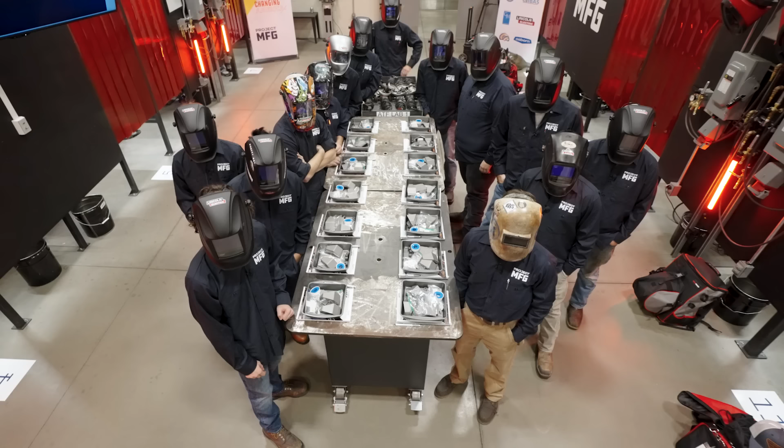14 of the most skilled student welders from across the country come together in one national welding challenge. Find out who welds their way to the title of Project MFG National Welding Champion.

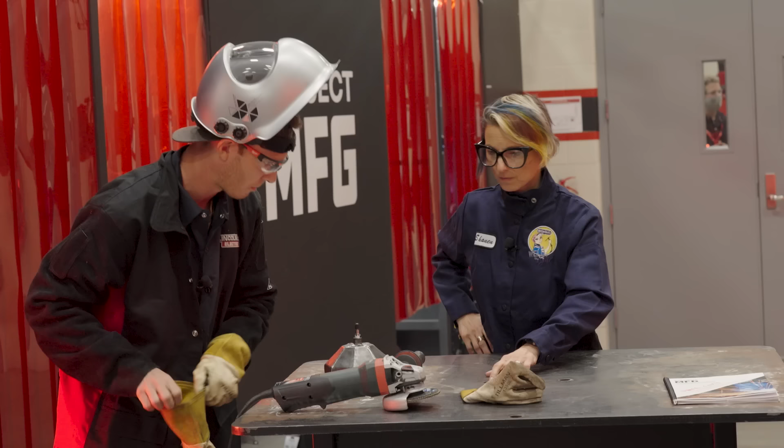Let's meet our panel of expert judges for the competition. Lead judge Shannon Aaronmore is the owner of Weld Like a Girl in Yuma, Arizona. Shannon is a certified welding inspector and educator who serves on 2 committees with the American Welding Society. A former college professor of wellness and psychology, she's known as the Wellness Welder and is passionate about empowering girls and women through welding. I want to have women and non-traditional folks represented in welding. It's exciting and it's fun, and I want to raise the bar.

Frank Dragolich has 32 years of experience in the welding industry, currently serving as the Lincoln Electric ATF testing supervisor and quality manager. Frank is an AWS certified welding inspector and educator who holds a patent for a welding process and has authored welding guides. He volunteers his time at the AWS, serving on the main Q&C committee as well as multiple subcommittees. I've performed over 700 welder qualification tests in the last 3 years. I see people have nerve issues every day. I think the nerves is what they're going to struggle with, especially with all these eyes on them.

William Anthony Kennedy is the Director of Sales for Osborn's Roller Technologies and Specialty Pipeline Division, with a background in both product engineering and creative design. He brings a costing engineer's perspective to the competition, as well as an eye for quality finishing and artistic expression. I think that it's challenging for the competitors going to be walking in blind, not knowing what they're up against, and then having to figure that out right there on the spot under a time crunch.

This competition is hosted at Lincoln Electric's world headquarters in Cleveland, Ohio. For over 125 years, Lincoln Electric has been the world leader in the design, development, and manufacture of welding products. Their weld school is the longest operating and most comprehensive welding training facility in the world. It's definitely way larger than any facility that any of the students that are competing were trained at. So just being on that kind of playing field, I know it's nerve-wracking. Being put to the test is definitely going to be challenging for each one of the competitors for sure.

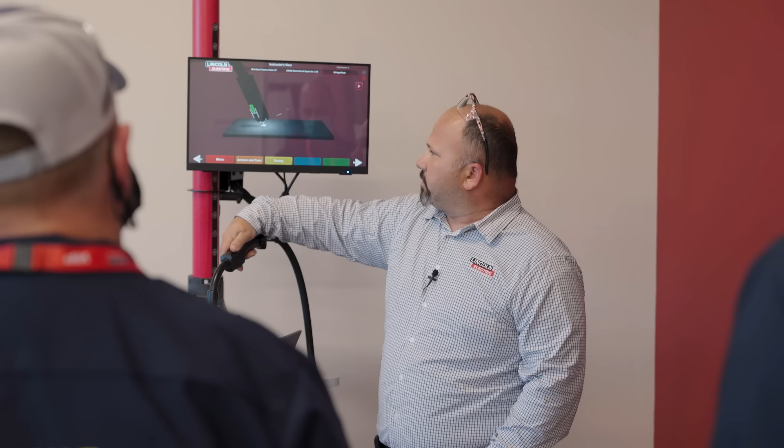We're trying to put students in a position where they don't feel 100% comfortable, because when they do hit the actual work field, they're going to be given challenges that maybe they're not anticipating. That's why we're doing what we're doing, to make sure that they're critically thinking when they're putting these parts together.

You guys know what a WPS is? It's not a work procedure sheet, it's a welding procedure specification, right? Pay attention. You guys get one shot at this, okay?

You guys liking this idea? Not so much. I like it better than the test. You like it better than the test? That's fair, I get it. Has any of you guys ever used one of these? No. It kind of gives an experience between the competitive level of everything to the stress level. It makes you question things, kind of forces us to stay on our toes, to be prepared for what may come along.

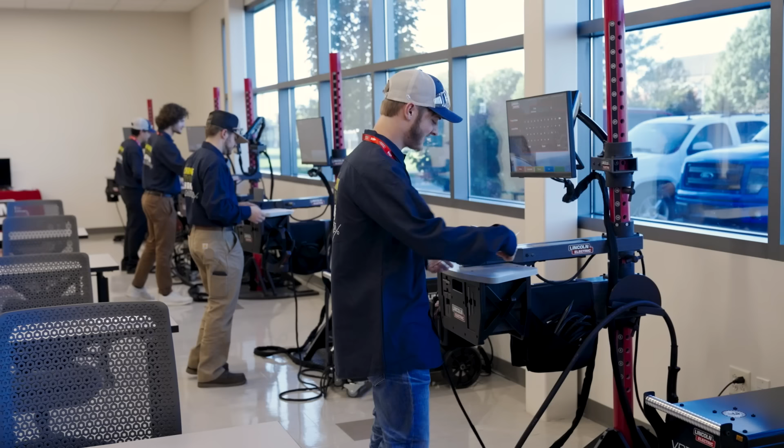Go. The welders start their virtual welding challenge. The task involves a simulation of shielded metal arc welding, or stick welding. The competitors make practice runs using the machine's advanced technology to alert them of adjustments they can make for a higher quality weld. Before time is up, they must complete one final weld without guidance.

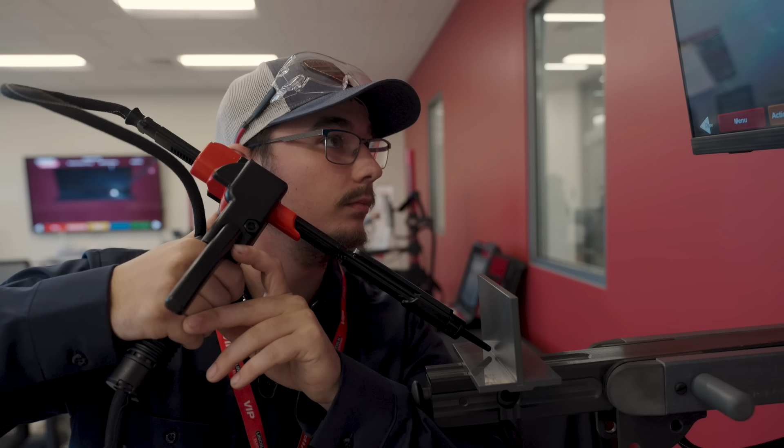Whatever score they finish with determines their placement for this event. It is similar to actual welding—it is not the same thing, but it does give you the muscle memory that will translate from the virtual world into the real world. It does pick up all the little flaws that maybe you'd be able to hide as an actual welder, but it's going to eliminate a lot of those flaws before you get into the welding booth.

It's definitely different. I can tell you that.

You guys have 2 minutes remaining. Please turn off your cues or else your score will not count.

My weaknesses are anything stick welding. It gets me out of my element, participating in competitions, and makes me nervous.

What'd you guys think? Was that fun? It's fun, it's different. Like it? It's weird. That's cool. Weird, cool, real weird. All in all, guys, excellent. If you have not used these before, you guys did a really good job.

Who rose to the challenge of virtual reality stick welding? With 10 points available, Wyatt Gwynn comes out on top with 9.6 points, followed by Peyton Schmidt with 9.3 and Nick Leone with 9.2. The written test results are still kept under wraps.

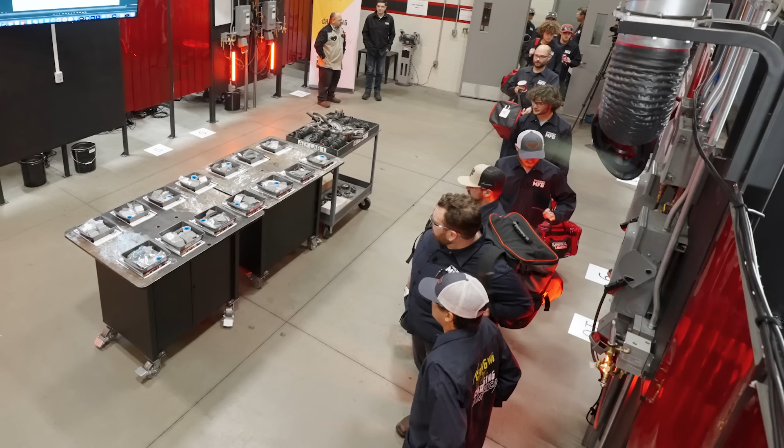Now it's time to see what these welders can do as the competition begins to heat up. The project specifications, equipment, materials, and time limit are all identical. What differs is each welder's plan of attack.

Going to a competition and not knowing what you're going to be welding on is like taking a trip across the country and picking a road you don't know where it's going to. You have no idea what the outcome's going to be. I'm going into this competition and I don't know really what to expect at all, so that's a little bit nerve-wracking because it could be almost anything. I think it's honestly very exciting not knowing what it is because everyone's entering on the same playing field.

Okay, here we go. 3, 2, 1, start. I want to challenge myself, so I want to see something I've never done before. When I open the playbook, I hope to see maybe a blueprint that's harder to read, that maybe I'm better at reading than everybody else.

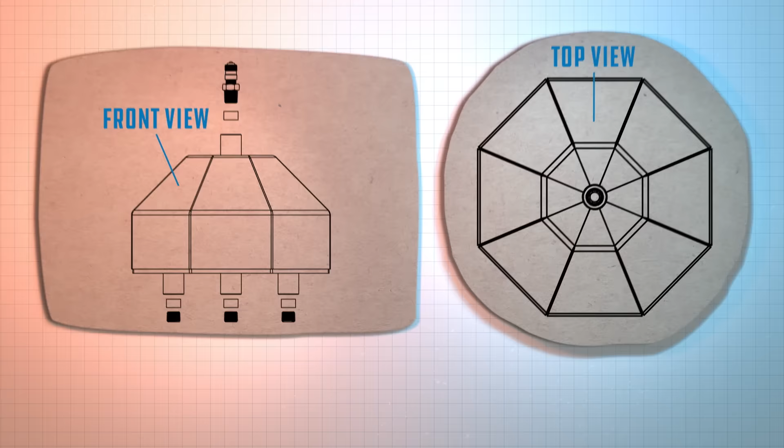Each welder receives a WPS, a welding procedure specification, that serves as a playbook for creating the product that meets production standards. In this challenge, they're making an octagon-shaped trophy with 8 individual parts welded together on a flat base using two common welding processes, MIG and TIG. The trophy is a pressure vessel, meaning it must be able to hold air without any leaks. No small task for a student welder.

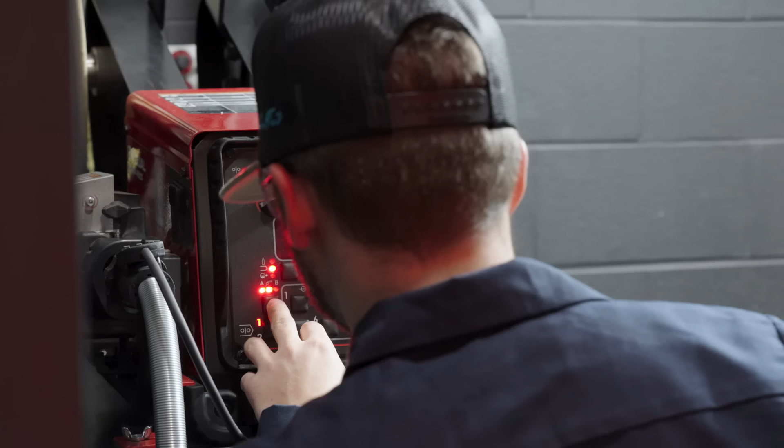How do you actually go construct something that doesn't exist? There's this problem, and this problem, and here are the criteria. And so now you're like, okay, I'm running out of fingers. And so critical thinking is essential for a welder.

Anyone who says, oh, they're just a dumb welder, I think you've got that completely wrong. I've met a lot of welders that were afraid of school because they thought they weren't very smart, but it turns out they're some of the smartest people I know because of what they can make.

Not everyone's good with their hands. Not everyone's made for the trades, but it's okay because college could be your backup.

Let's see what we got here.

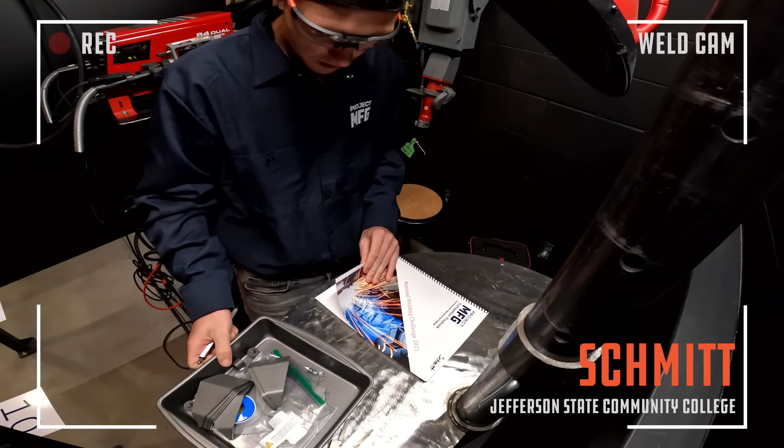What do we got? I graduated from the University of Alabama with a business degree and didn't find any jobs that I wanted. College is saturated right now, and you don't know what jobs are going to be available in the future, but we all know that the trades are going strong.

My dad's been super supportive of this path. He's the one who bought me my first welder, so that was pretty much what got me into it. It was a cheap 90 amp flux core welder, and I fixed his exhaust pipe on his truck, and it felt so good to be able to do something where he would have had to take his truck to the shop. I went and got underneath it and just patched it up, so that was really probably what got me - him getting me a welder and just supporting it and saying, yeah, go for it.

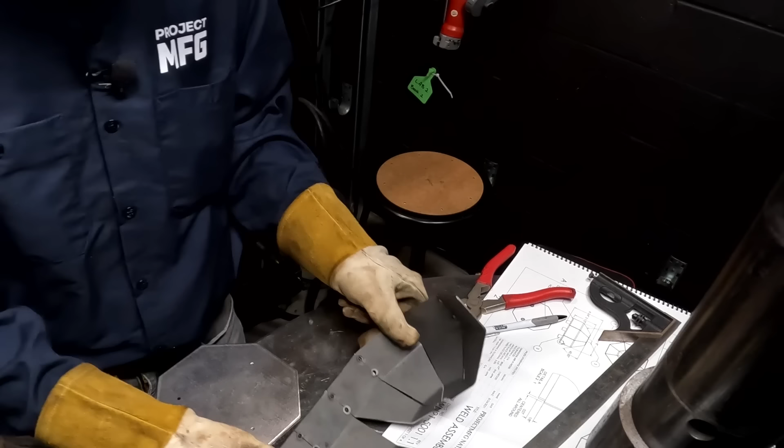I lost a competition when I was 17, and then after that, I just drove forward and I said, I'm not gonna let that happen again. It's pretty amazing that I have the opportunity to be here.

I had a fascination with metal, how you could take something so solid and turn it into whatever you wanted. I've always been fascinated with fire as well, so just metal, fire, and creativity all in one.

It's time for a little Welding 101. Welding is a fabrication process that uses intense heat and pressure to melt and fuse metals together.

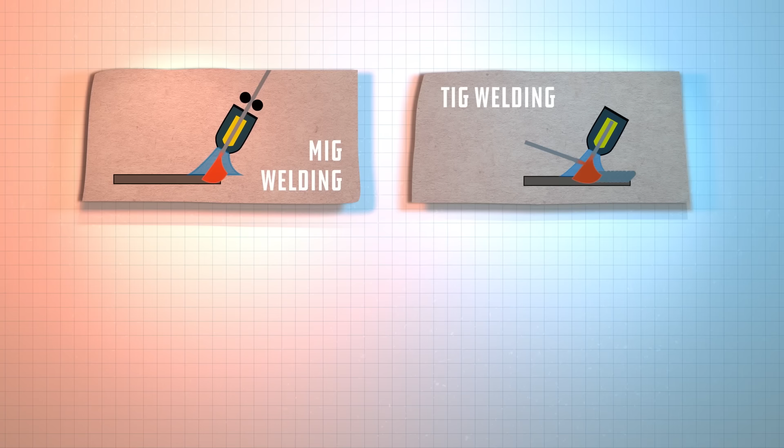While it may sound simple, there are several complex types of welding, the four most common being MIG, TIG, stick, and flux core. MIG welding uses a wire fed through the weld gun that acts both as an electrode conductor and filler metal, first creating the spark, then melting to form the weld. One of the easier processes to learn, MIG is popular with beginner welders. An efficient way to weld metals of varying thicknesses, MIG is widely used in the manufacturing and construction industries.

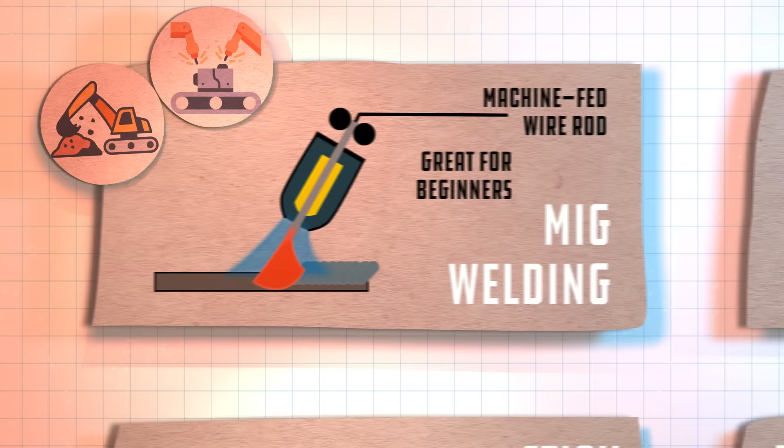While MIG relies on an ongoing wire feed, TIG welding uses a non-consumable tungsten electrode to heat welding rods that are placed by hand in a pool of molten metal to fuse two metals together. Often considered one of the most challenging methods to master, TIG welding requires a great deal of skill and finesse to produce the precise and detailed work often found in aerospace, automotive, and construction industries. Now that we've sparked your interest, let's get back to the competition.

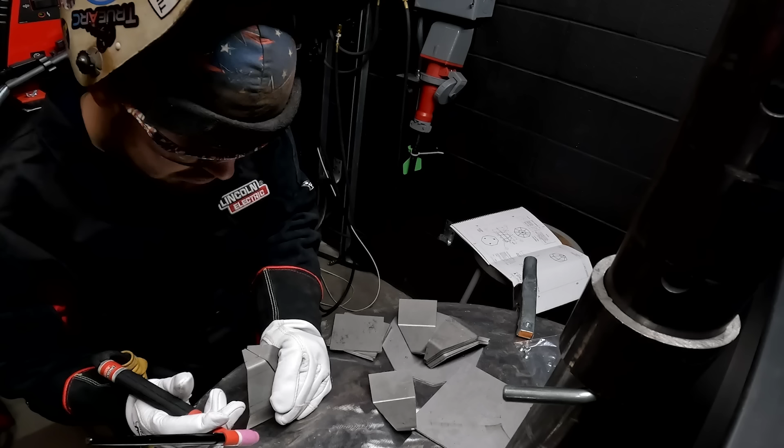Well, this is gonna be interesting. I'm smooth sailing right now. I'm a great TIG welder in my opinion, but that's a welder saying it, so every welder is gonna say that. Blueprints can get me sometimes, but I'm not saying I'm terrible. It's just they throw in a few tricks there, they might get me.

Everybody out? Come on out. Guys, I just got a phone call from the engineers. We got some change orders. Uh-oh. Okay? We're gonna go ahead and go to the mild steel trophy base.

You guys see that? Right there it says process GMAW spray transfer. We're gonna change that to short circuit transfer. Wait, can you repeat that? The change order details from the engineer include technical changes to the process, wire speed, and voltage settings. It's up to the competitors to take accurate notes and implement the changes. The welders get back to work with the adjusted plans in hand.

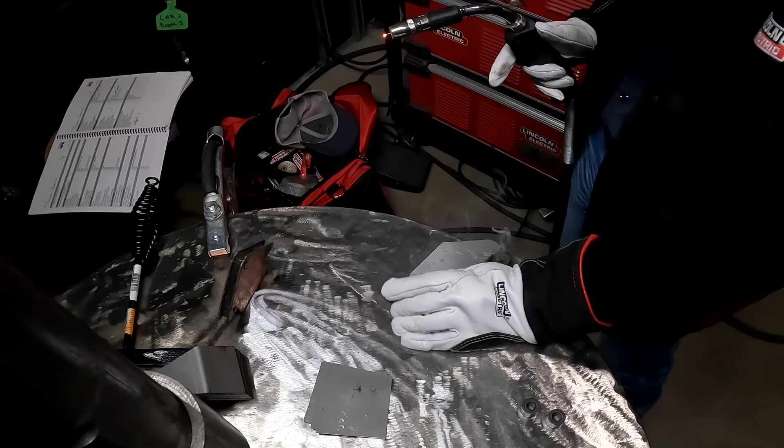Pretty confident. I'm a little maybe overconfident, but I was glad to make it into the competition, come up here and show what I can do.

Okay, so how are you feeling? Pretty good, it seems to be going pretty good, it ain't too bad. Okay, you're not feeling overly nervous or anything? Nah. What about that field change, did that throw you for a loop? It was unexpected, I didn't expect that. It was a little different, but I hadn't started yet, so it's still going all right.

I'm from Hodges, Alabama, which is middle of nowhere. There ain't much of anything there, there's a stop sign. That's mostly why I was in the hobby of building stuff and doing stuff like that, because there ain't much else to do. Making money with your hands has always been what I wanted to do, and welding's just the one that always appealed to me the most. I found it pretty entertaining, so here I am now.

Before you weld a project up, is there anything you do specifically to make sure you have good luck? I make sure I read the blueprint a bunch of times, make sure I know where every weld's going, how it's gonna go, what order I'm gonna do everything in, and then I stick to my plan the whole time. Stick to the plan, I like that. Once you do it, you can't change it.

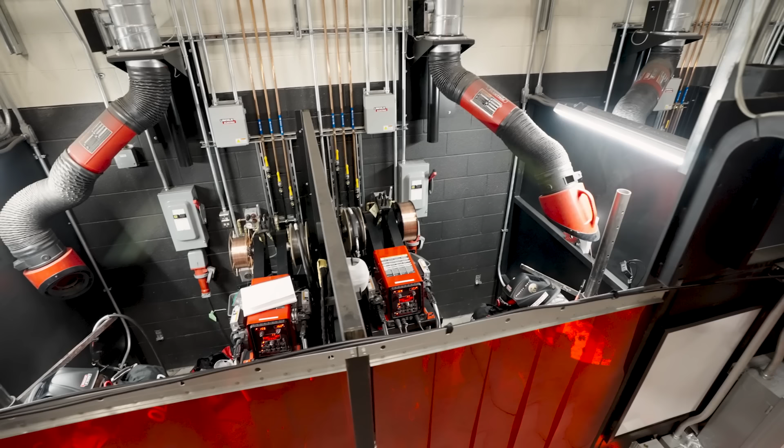We're gonna have a little bit of a tricky fit up, and so they're gonna have to compensate for that. So that'll be interesting how they handle it, so the most complicated one.

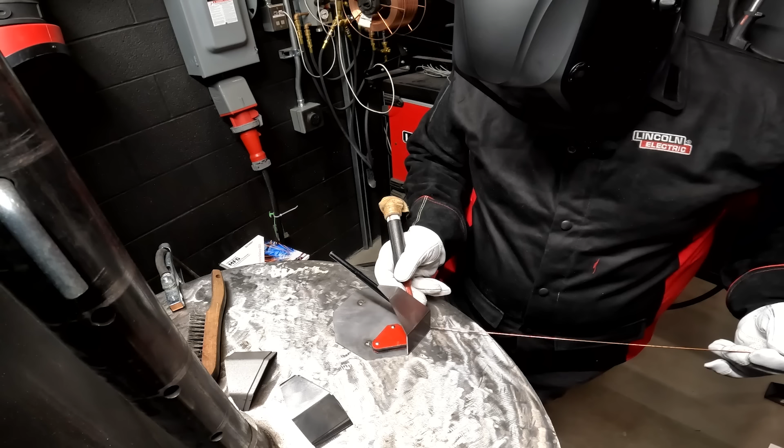Competitors begin fitting up their project using different methods. Individual parts are positioned with thin gaps in between where the welds will go. Getting this step right is essential to the quality of the final product, which must be leak-proof. There is no room for error.

What I actually do for Lincoln Electric right now is I run our American Welding Society accredited testing facility, and I test welders every day to determine whether they can weld or not. I've even tested our own weld school instructors, and even these guys who weld every day and have done this for years. On test day, they get very, very nervous. Their hands start shaking, they start sweating, they start forgetting the next step and what they're supposed to do.

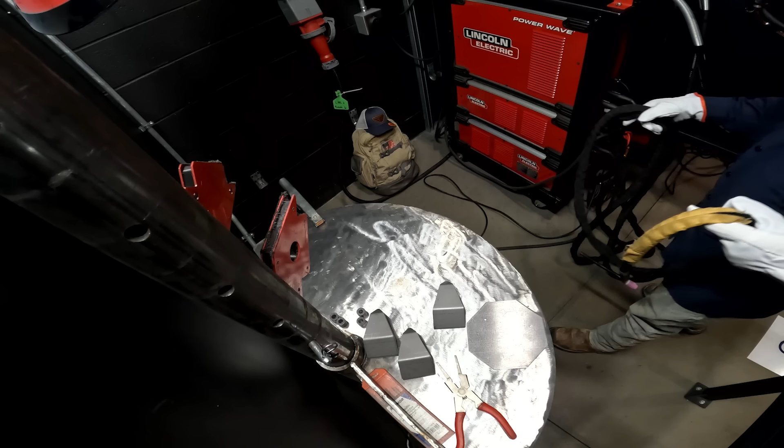So tell me what's going on in your head right now. Just what's to do first, there's so much to do, I just don't know where to start. What do you usually do to manage your stress? I just take a deep breath, take a minute, get back out of my head and just go on with it.

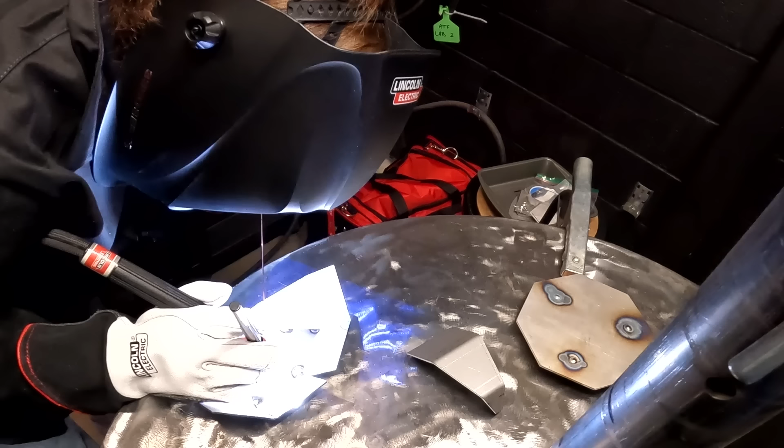If you got a dream about it, go for it. I mean, that's what I did. I had a dream and I taught myself how to weld. You taught yourself how to weld? Yep. Wow, okay. And I've achieved a lot. Well, you got to the final round, you obviously did something right?

I think it's very fascinating how you can join two pieces of metal by using electricity and all that. I've been doing it for five or six years. I've been welding on thin stuff, thick stuff, I've practiced a little bit of everything.

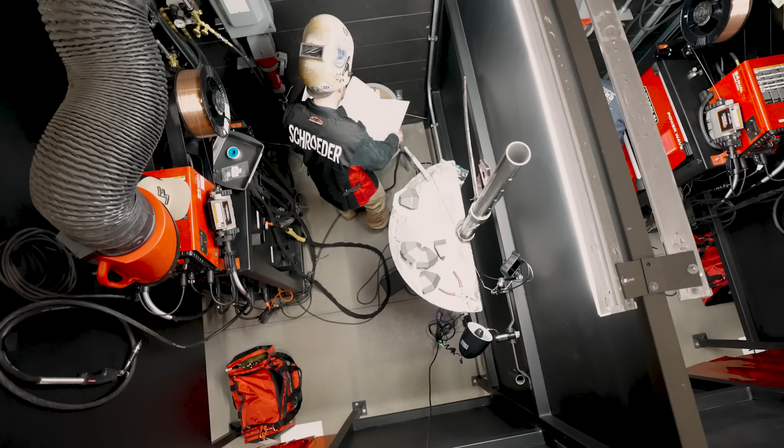I'm nervous. If you're nervous, you're not ready. We've been preparing for this, that's all we did in college was prepare for challenges. You know that phrase where the man sits for two hours sharpening his axe while the other man just goes to it? That's what we were taught. Sit back, play it out in your head, because you're gonna run into way more problems if you just jump right in and not even think.

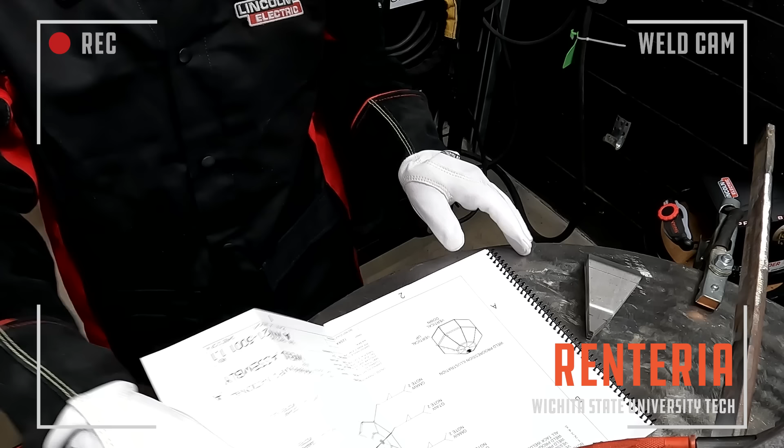You gotta relax, calm down, even though you hear all these people getting ahead of you. It's okay, worry about yourself.

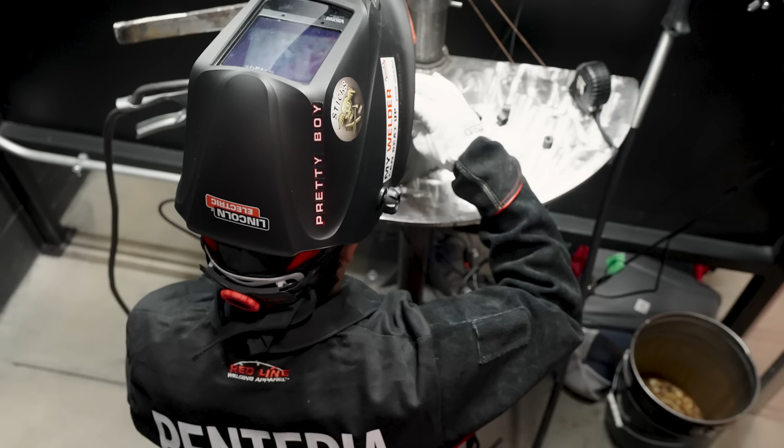I haven't been paying attention to anybody else, man. Just here doing my thing, trying to be a little bit different with my approach to things.

Peyton approaches his project from the inside out, laying the pieces out flat, TIG welding on the inside to tack the pieces together, and then folding it up into the final shape before attaching it to the base.

Put myself in a predicament. Other competitors assemble their products upright on the base, welding from the outside.

Please hold, please hold. Please hold, please hold.

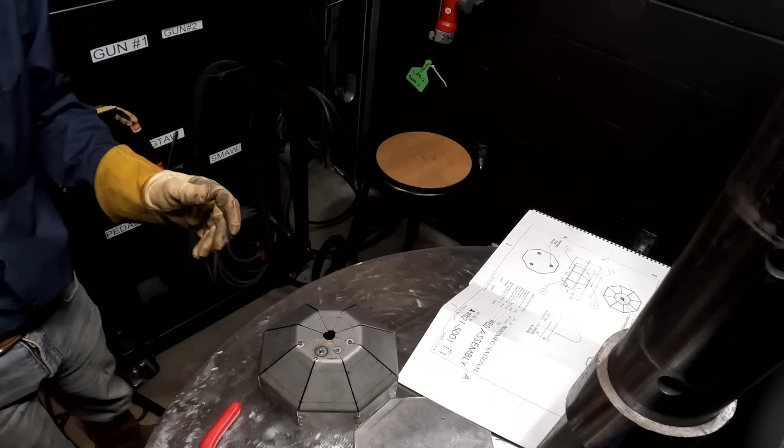It's definitely a lot more than what I thought, just putting it together, figuring out which pieces I need to put on first, especially that top piece. I didn't know if I should weld them off first, grind down, and then put that on top, or just put it on top and try to weld to it. I boxed it up, and it looks like it might be a little oversize to the base. Because of the way I tacked it up, there might have been a little gap, but there's really nothing I can do about it now.

Right, because we're in the contest and there's a time component. You think you're gonna finish on time? Oh yeah, I'm gonna finish on time.

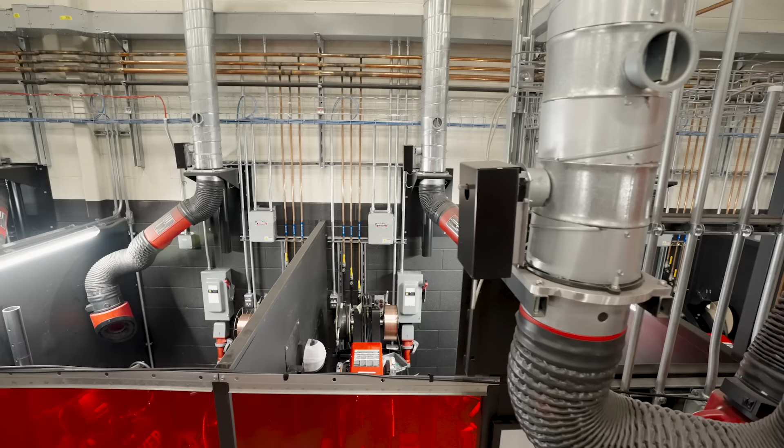I see myself owning a fabrication shop. The jobs you can do are limited by what tools you have, and tools aren't cheap. So I'm just doing what I can, working part-time, going to school part-time, and there's always gonna be work available, always.

Setup is crucially important in fabrication.

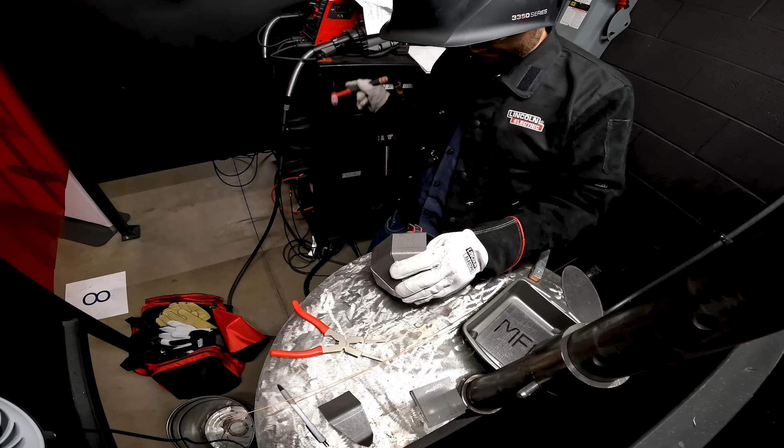Welding for me was more of a meandering path. I didn't really decide I wanted to do it as a career path, I just wanted it as a skill set so I could build and repair things I wanted to do as a hobby in my own time. I actually grew up in Indiana and moved to Kansas City following a job, and decided to go to Johnson County Community College to learn some different skill sets. I've been through their heating and cooling program, and I just finished their welding program and got a degree in welding.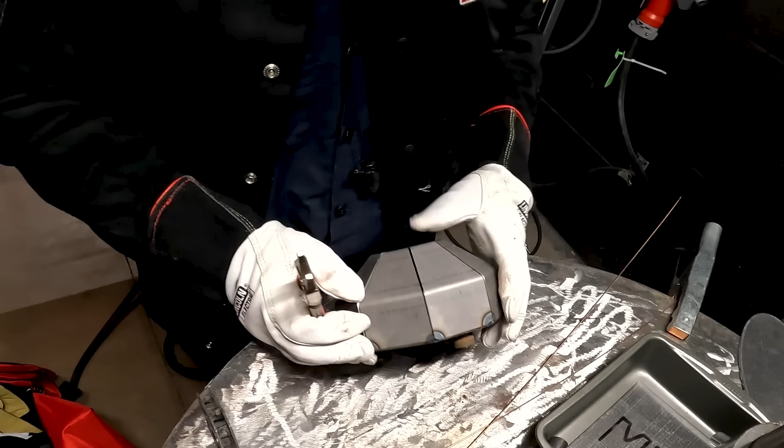How are you going to keep dimensional tolerance? With aggressive tacking, making sure I've got everything pretty locked in before I put some nice hot welds down that I know are going to be distorting and trying to move that metal. I'm going to have to use that term, aggressive tacking. I like it.

When I asked the guys, was the field change, did that make you nervous, was that upsetting? Some of the guys were like, no, it didn't bother me. And I was like, oh my gosh, that means they didn't know what they were looking at. Because clearly a spray transfer is very different from short circuit, and they didn't see that.

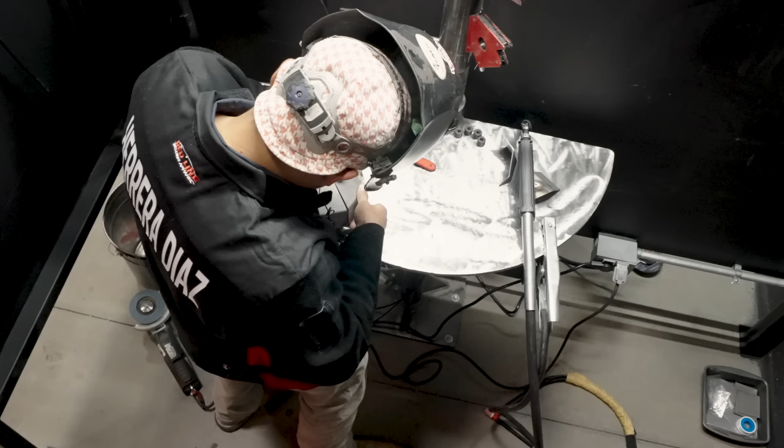There's definitely a couple of them that are struggling to follow instructions from the get-go, and that's going to bite them in the end, because missing the important details up front is going to destroy their ability to complete this competition in a timely fashion.

What I hope to bring to the competition for these competitors is I've got an eye for art, and also as a costing engineer, so I'll be looking at the process and products and how they're going about it to see if they could do it more cost effectively.

Competition always drives you to be better, and so absolutely the competition will allow these guys to push themselves to strive for more, and then when they get out in the field with that energy, they'll just do a bang-up job. I think it gives them a goal to strive for.

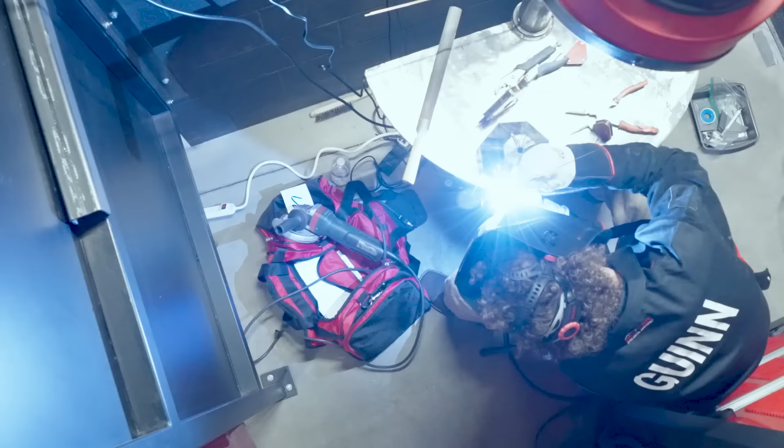I think looking for the prize at the end definitely has something to do with it. The guy next to you is going to drive you to be better, and so on and so forth. Everybody pushing each other to do better. Somebody's going to come out of this shining like a golden star.

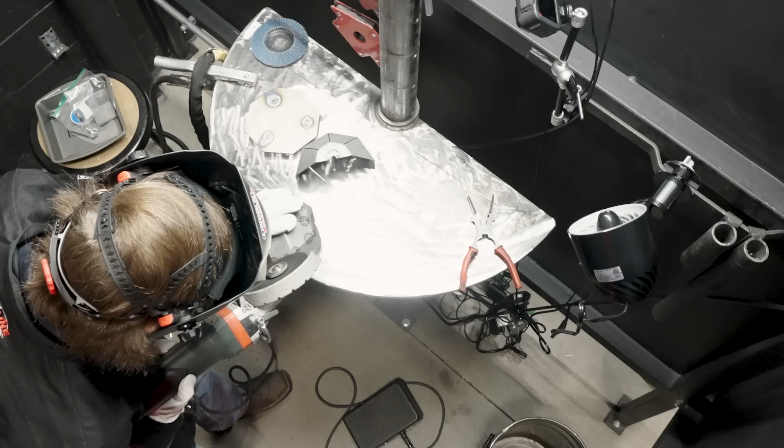While welding is a hands-on skilled trade, it also requires brain power. Welders must have a deep knowledge of welding processes, materials, types of gases, math, and intricate industry terminology and symbols. It's time to find out who excelled at the surprise written test, created by welding school instructors.

Nick Leone takes the lead with 18 points out of 20 available, followed closely by Peyton Schmidt at 17 and Blake Schroeder at 16.8. Will their book smarts translate in the hands-on competition? Let's watch more action unfold and test your mettle.

I've always been better working with my hands than I have with book work, so I felt better welding than the actual written test.

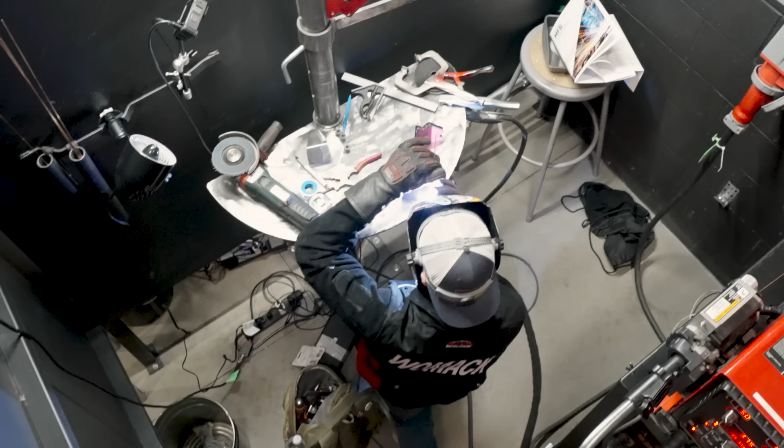Clayton's written test score fell right in the middle of the pack. He'll have to make up for the lost points by proving his practical welding expertise. Before doing the actual welds, Clayton uses scrap metal pieces to practice the MIG and TIG welding processes. The project specifications call for alternating MIG and TIG to close the gaps all the way around the trophy.

I just kind of practiced a little bit of everything, what I knew, brought it back to basics. Definitely the appearance of my TIG welds are not the best, but that's always something I can work on.

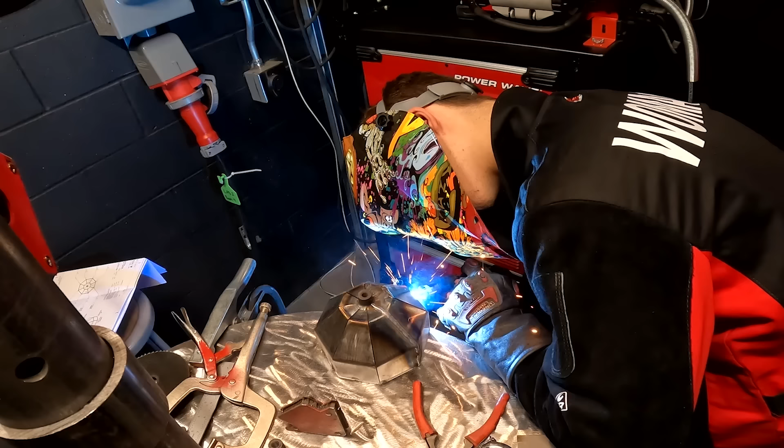It's been a while since I've done a lot of the book work. I'm pretty confident in my welds, so if someone wins, then they definitely deserve it. That's the effort that I want to give and the attitude I want to have when I'm done.

I don't know. I think I'll just do it.

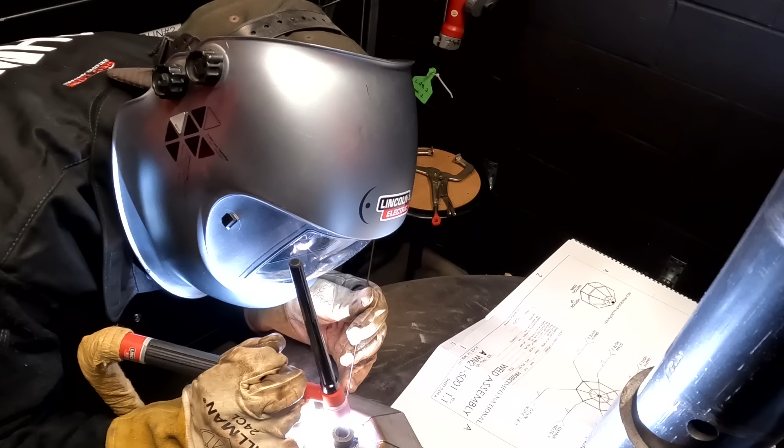I didn't want to use my practice metal or my scrap metal to dial in my machine because I was honestly in the beginning worried about my time. So I just thought I just need to throw this thing together, put welds on it, and just try and do my best. I started welding and then adjusted my settings to my piece, which is not what you're supposed to do. But when they put the timer on you, they put you in a new place, down to the gloves that you've been using every day, to the welding hood that you look through every day, that's what adds up. That's what makes it difficult.

Whew, welds are not looking good today, boys.

It's like rock climbing. When I go to rock climb and I stare up at the face of a rock, it's constant analysis. You think you're gonna do this one thing and then you get up there and it doesn't look like what you thought it was going to. Or maybe my legs aren't long enough, or maybe there's just a perspective shift when you get up there. So welding is the same. It's continuous critical thinking, reevaluating, and correcting the problem before it gets too big.

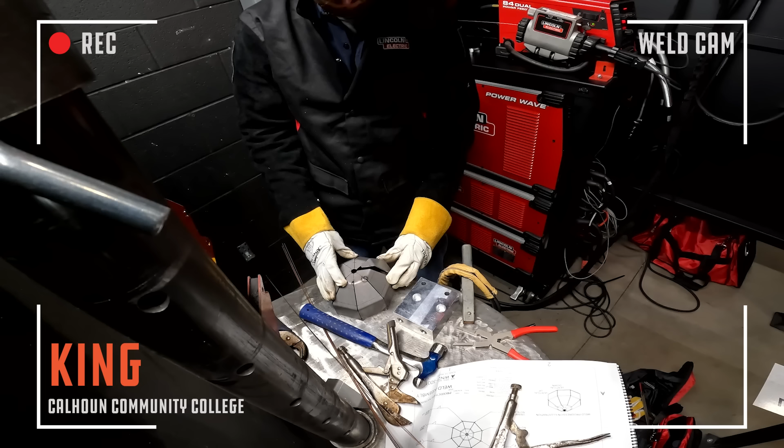Just as Luke King from Alabama fits up his final piece, he realizes the opening isn't the right size. With time counting down, he must decide what to do: try to make it work, or take it apart and start all over.

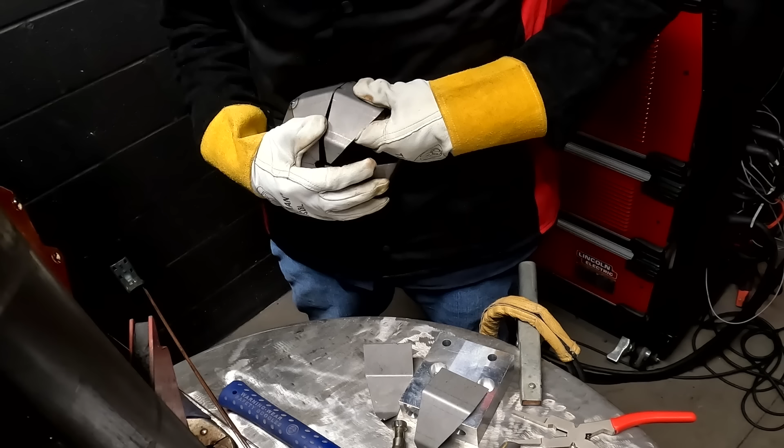So it's not good? Not going the best. What happened? I got out of square and had to kind of start all over. Did you have to take it apart? Yeah, most of it. You think you're gonna make it? Time crunch, we'll see, it'll be close. Clear my mind and just get it done. I know my job.

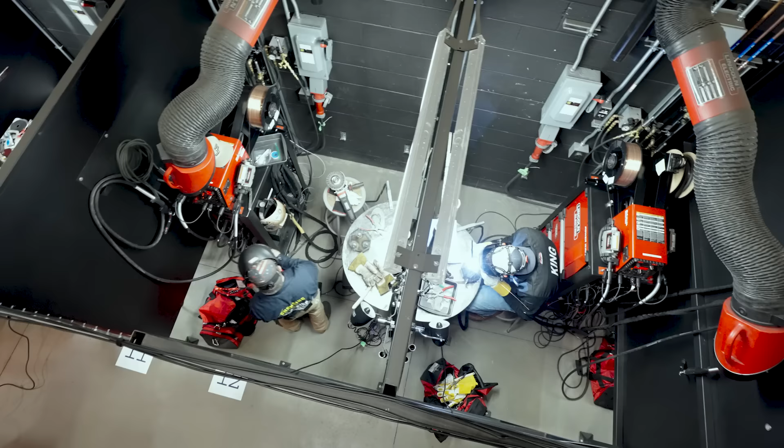The one thing I definitely tell every welder who comes through my department is that you are your own best welding inspector. You are the first person who can reject your weld. So be the first person to reject it, fix it before anybody else sees it. Make sure the weld is right, because you as a welder should have those skills.

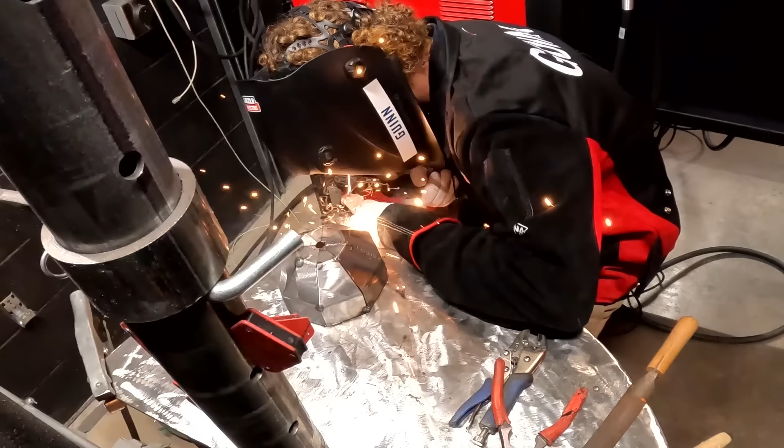TIG, just being real finicky with it, just having the finesse to weld some smaller gauge metal. I do a lot of structural welding, so going from stick welding to TIG welding, it's gonna be weird. You want to see full fusion, fusion at the toes of the weld, so it looks like it's really tied in well.

And there's always some kind of geometry, there's also tons of measurement. Make sure that everything is exactly in the angle that it should be. Oh, ho, ho, ho, like a glove.

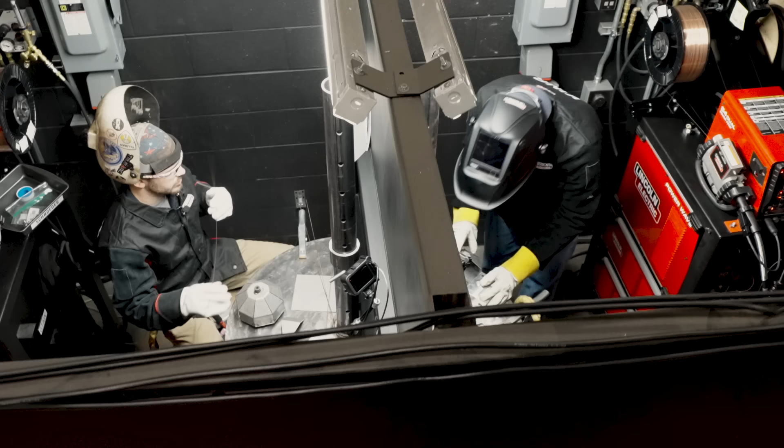How you feeling? All right. You're a little hesitant when you said all right. Well, I'm just trying to rush it. I just need to let it cool down just a bit, calm down and let it cool down.

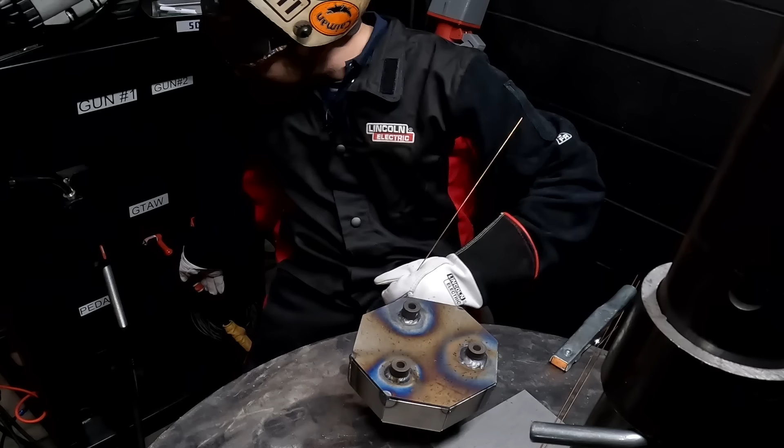I'm gonna go back in there, see how hot it is still, see if I can cool it down a little bit. Maybe do some TIG since I can kind of control that heat input. But I don't know, I might just try to wave it around, whatever you gotta do to get it cooled down. That's warm.

What the hell? There's no way that gas could have gotten turned off, right? Because I just struck this arc and it acted just like there's no argon at all. I'm not going crazy, am I? No, tap that, the argon's full. Tap that pedal for me. Where'd you lose your argon to?

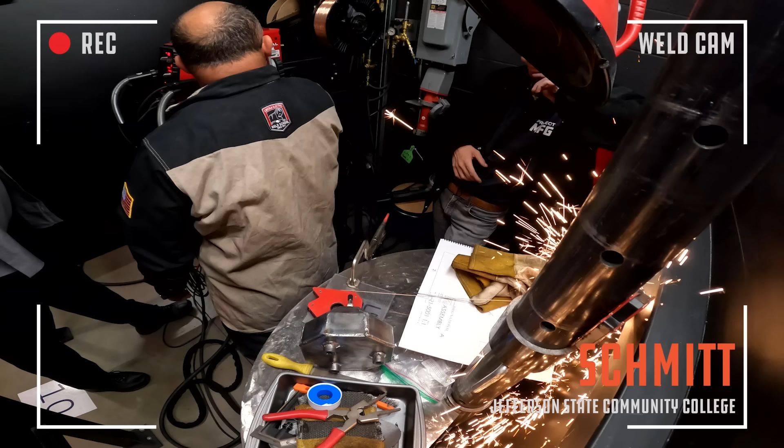Whoa, whoa, whoa, whoa. God dang it. All right. Why is this happening? I've never seen anything like it.

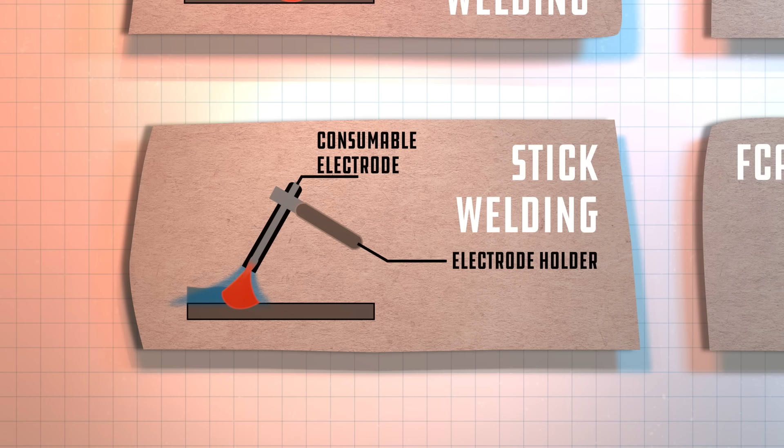Welcome back to Welding 101, where we'll learn about 2 more types of welding. One of the oldest techniques, stick welding, is known for its portability and uses welding rods or sticks as a filler metal to bond the weld. During this process, a current forms between the electrode, the wire stick, and adjoining surfaces, which softens and fuses the metal together. The wide use and versatility of stick welding makes it a great option for a range of projects, from maintenance and repairs to underwater welding.

Flux core arc welding uses a hollow wire electrode fed through the welding gun and into the weld joint to fuse the metals. This type of welding works well on thicker metals and is often used for heavy-duty welding in industries such as shipbuilding, construction, and manufacturing. Stick and flux core welding use a physical barrier to create more protection from external elements, making both ideal for outdoor welding. Welding 101 class is dismissed.

The clock is ticking, and every minute counts. In the race to the finish, we'll see who rises to the challenge when things really get heated.

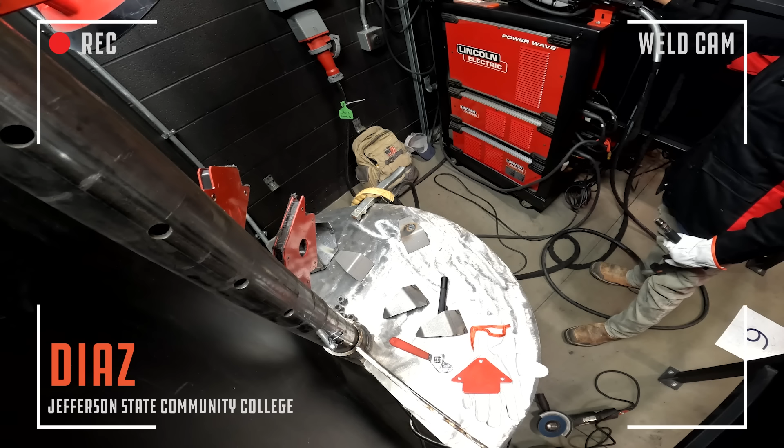If you're on a different welder that you're not used to, settings on one are going to be different on the other. And in my job right now, I'm hopping on 4 or 5 different welders a day. It's not new to me knowing that different machines are different. It's just having the time to figure out your machine before you're just thrown on a timer and everything like that.

You got something making contact between 2 things that shouldn't be making contact. But what? There's nothing. I hope it wasn't something from the other booth that came over into this booth.

As the Lincoln Electric pros swap out the machine, Peyton does what he can outside the booth so he doesn't lose any more time. It puts me in a mental state where I have to overcome something, whether it be like fear, anxiety. It adds for moral character, growth because of how much trouble I was having in the welding booth.

Excuse me, sir. I'll squeeze by you for a second. Go ahead.

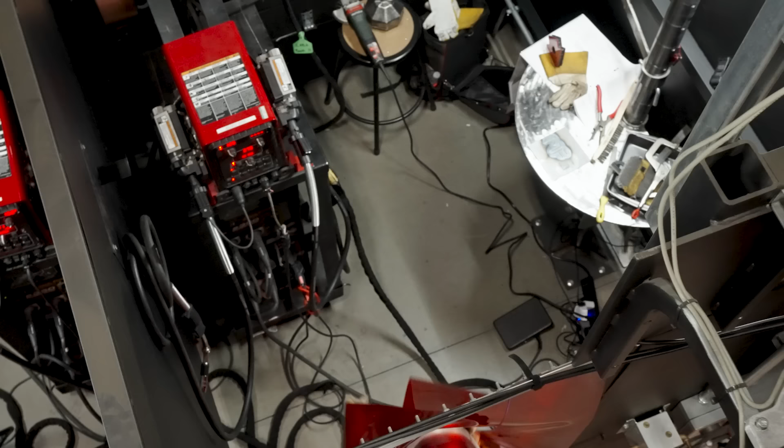It's hot. Is it? That's what it is then. Your machine was touching his machine and shorted his machine out. They uncover that the competitor in the next booth over accidentally put his machine in flux core mode, which turned on a new wire feed. That wire crossed under the wall into Peyton's booth and shorted out his machine. This kid here's got a winning part, and I hate to see him struggling. With a new welding machine in his booth, Peyton gets back to work.

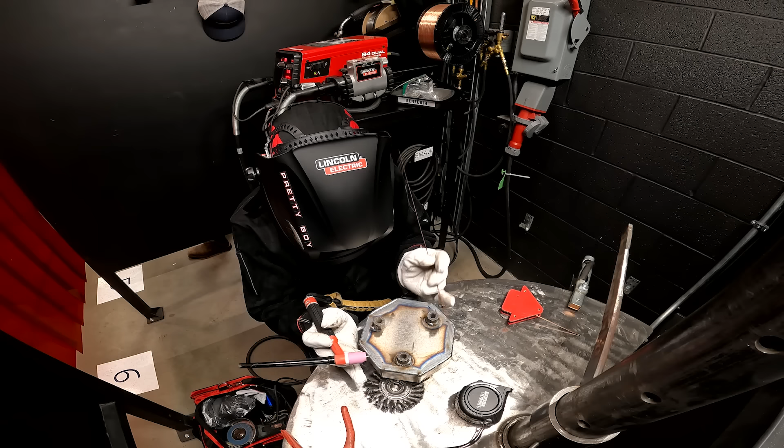All the competitors are flying fast, but they must make time for more. They are tasked with producing a creative element on a separate piece of metal, where they'll show off their personalities through a personal brand. This challenge is designed to highlight creative thinking and the ability for welders to bring their unique perspective to a project.

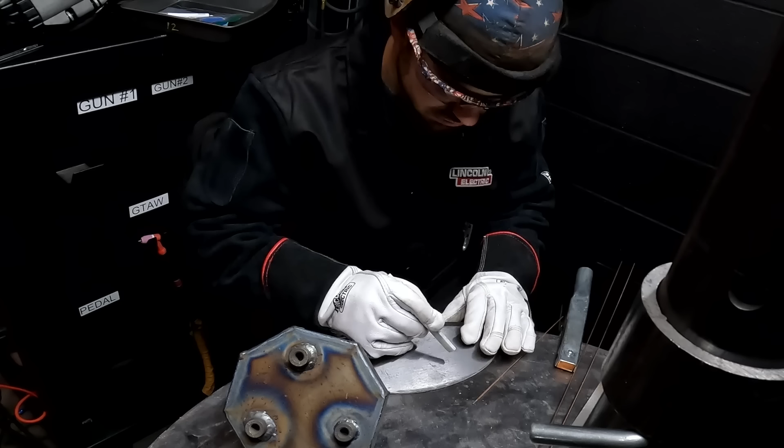I want to know what they use for their creative piece. They can weld really well, but what else do they bring to the table? You don't have to be an artist to be a welder. People who can build concrete things, when they learn the skill of welding and they start making tangible items, their creativity comes with time. They push you to the limits, make you think outside the box, creativity, operations, the order where you should weld, all that kind of thing, placing. It just makes you a way better welder, in my opinion.

Time is running out and every minute counts. Competitors work to complete their projects and come up with a creative element.

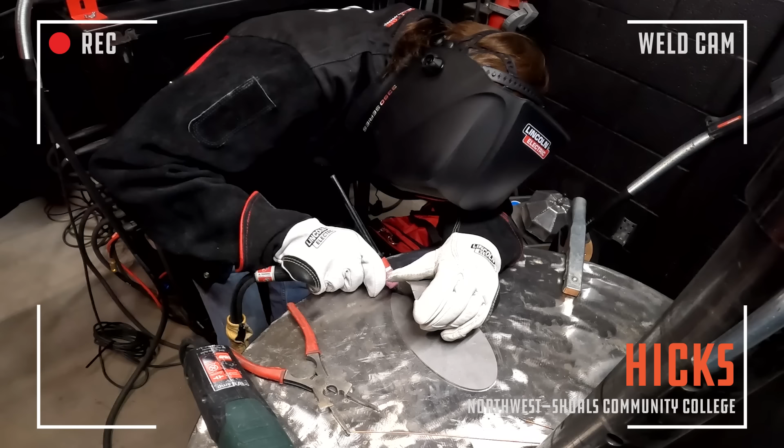Both Nicks decide to tackle 3-dimensional creative elements. Nick Hicks starts with an ambitious project using his leftover materials to make a cave and fire pit, representing some of his interests. Nick Leone decides to use extra filler metal to spell out the letters of the trade school he attended. Will the extra effort pay off if they don't finish in time?

Sometimes people really get so whipped up, they get overwhelmed and they want to give up. And I always tell people just take a breath. You are your own worst enemy.

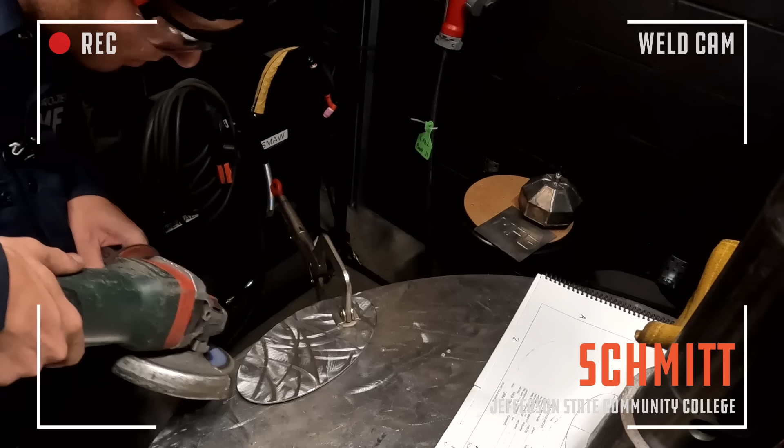I'm digging that. I'm trying to make 6 figures like every other welder is. I could sit behind a desk, but as a career and 8 hours a day, I love physical labor. There's so many opportunities through welding. You can just go down one path and then go down another one and still do the same thing. And I worked in this lab on a daily basis.

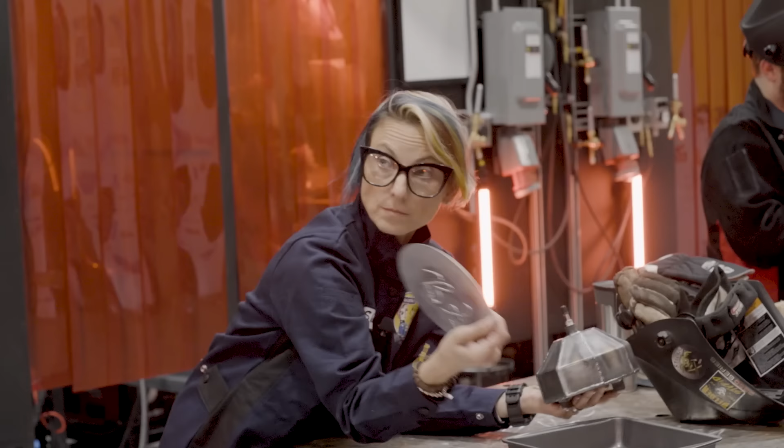Oh, he's done? Okay, we got someone done. Extra points. Blake is the first competitor to finish with almost 55 minutes left on the clock. He will receive 5 points for finishing first.

You know, if a welder doesn't look back and think he could do something differently, he's not a welder. So there's plenty of stuff where I look back and I'm like, man, I should have done this a little bit differently. But all in all, it went pretty smoothly.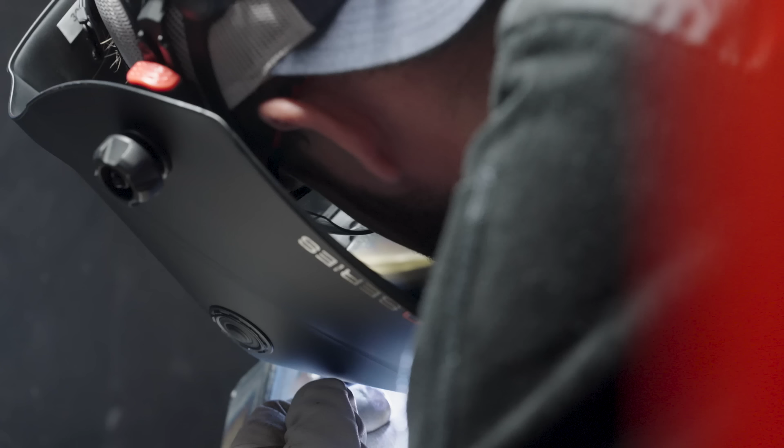He's followed closely by Nick Leone, who came in just under 3 minutes later. I'm not confident that I'm going to win, but I'm confident that I'm at least going to do a really nice job with what I'm trying to do. So we'll see. Seeing the final product at the end of it, that's what drives me. That's what keeps me going, keeps pushing me, and I learn every day. So I don't think I'll ever stop learning.

Yeah, let me see. I learned a lot. I would read over the WPS. I would check my welding machine multiple times to make sure that settings were still correct after I had changed things around. But I stuck with it and I just tried to make it look as good as possible. I made sure that it held pressure and it came out looking decent in the end.

Contestants, you have 10 minutes left. Despite the machine issues, Peyton finishes with time to spare.

When I was walking my piece to the table, I had not seen anybody else's. I was down bad. Maybe just in the middle of the pack, you know. I mean, I always have doubts. I feel like if you get too comfortable, then that's when failure slips in.

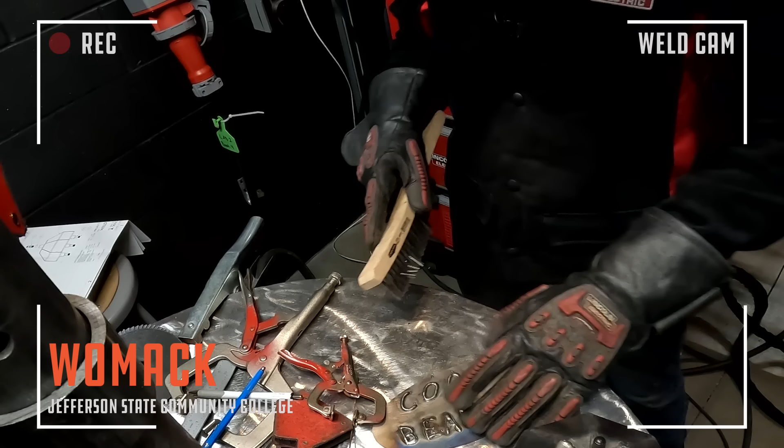Clayton turns his final project in with less than 5 minutes on the clock. I was sitting down there earlier thinking about when I started a couple years ago in high school welding, and I didn't think I'd amount to anything close to this, so it's just a huge blessing to be able to even have been invited here.

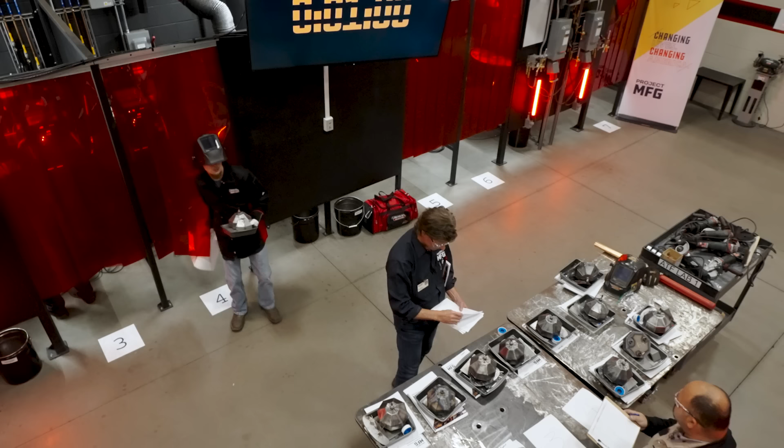Nick Hicks stops midway through his creative element, leaving it incomplete. The remaining competitors turn in their projects with less than 30 seconds to go, whether they are finished or not. Whose projects will measure up in the judging rounds? Stay tuned to find out.

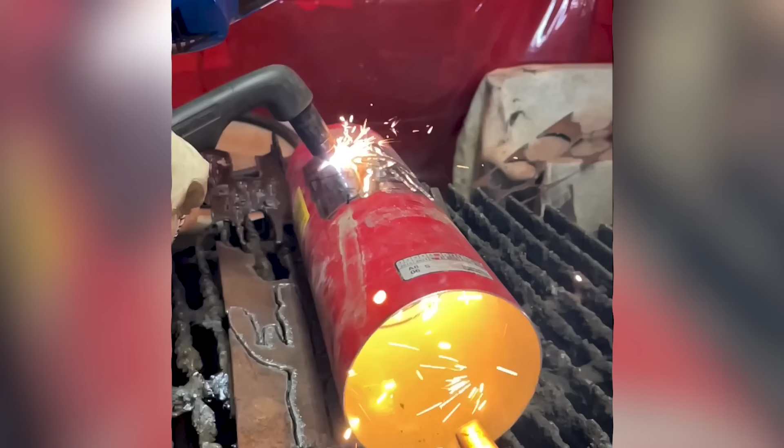Weld Like a Girl started off as a girls and women's empowerment project using welding fabrication. And I soon found out that boys and men also want to learn those skills. Everything is project-based, and that way it helps build confidence and self-esteem, but it doesn't have the pressure of a 16-week semester. The whole purpose of Weld Like a Girl is to open up a world that you didn't know about and to show you that you can do something you didn't think you can do. Because at the end of the day, then you can ask yourself, what else can I do that I didn't think I could do?

With the competition over, welders present their final products and creative elements to the judging panel. They each recap their performance and explain what they chose to do for their creative element.

Did a little fire pit in there and some logs and all that. Very cool, that's a great idea. Yeah, it would have been great.

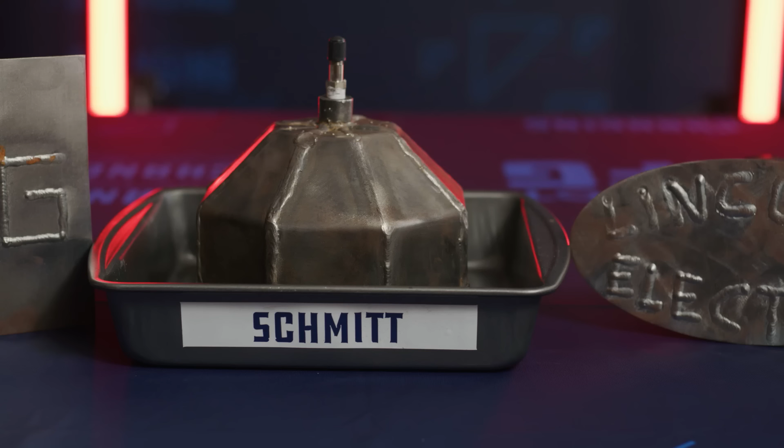I built the Clash of Trades, and then I put the emblem, made it as close as I could to the hat. I figured that y'all might like that. I just tagged on Lincoln Electric, and I tried to put a little background marks in there with the grinding disc. Excellent use of texture.

I thought about it a little bit and I said, well, I could do something in the flat, but maybe it'd be kind of fun to do something in the third dimension. So the only material I had to work with was some extra filler. So I decided to do the initials of the school, that's where I learned this trade.

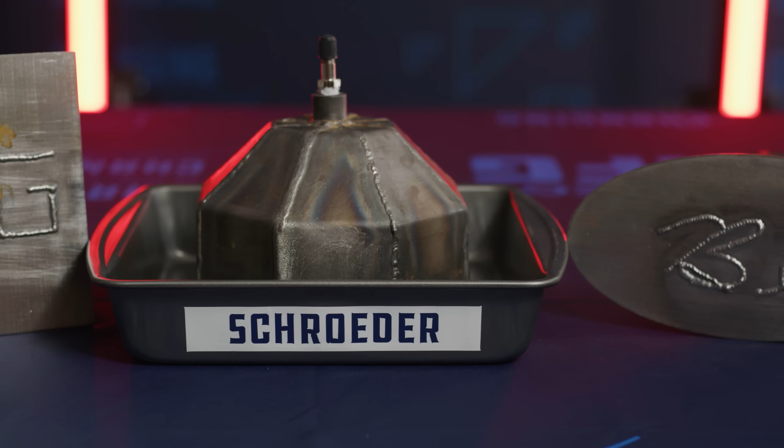It's nice. Thank you. I had 5 minutes left at the end, and I finished without any major hiccups, so it was all cool beans. I did my initials because they kind of have a joke with them.

Did you really think we were going to take your BS today? Honestly, I thought it was pretty creative. We were trying to get a chuckle out of it, but I had to say it. I was like, I hope I didn't cross a boundary there. No, I think everybody could not keep a straight face.

Not all competitors had time for the creative piece and will lose out on those points for not completing the task.

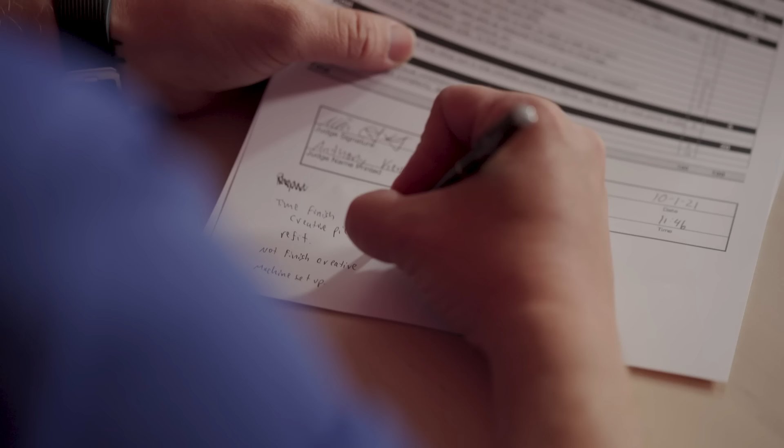After creative element judging is complete, Nick Leone and Peyton Schmitt are still battling for first place, with Nick at 31 points and Peyton at 28 points, with a total of 35 available.

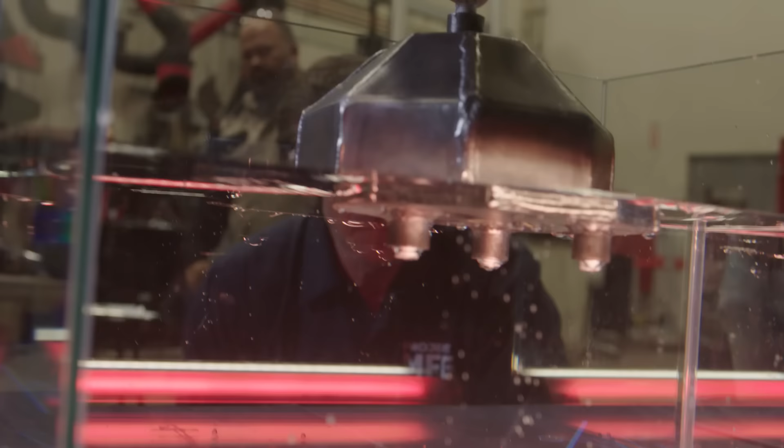Next, the trophies are put to the test — the pressure test, that is. Remember, these trophies are designed to be pressure vessels, meaning they must hold air. Everyday examples of welded pressure vessels are propane tanks, air compressors, and water towers. If any of those vessels leaked, it would not be good. In this test, bubbles are bad and reflect an unsuccessful weld. The test is worth 15 points, so this really matters.

4 competitors have no leaks and receive perfect scores on their pressure vessel tests: Payton, Jesse, Luke, and Clayton. This pushes them to the front of the pack. Payton pulls ahead of Nick for the first time since the virtual weld, with 43 out of 50 points available. Jesse, Oliver, and Luke King land in the top 3 for the first time, and Clayton is trailing by only 1 point. However, there are still 50 points available in the final round of judging.

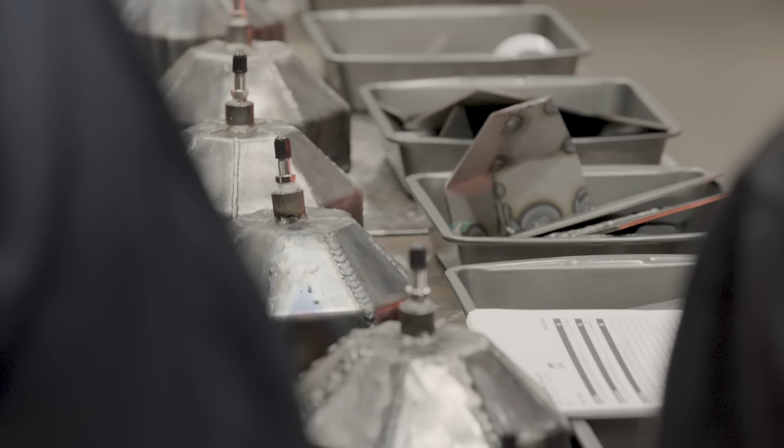This new generation of welders, not only do they have to deal with the increasing complexity of the technology coming along with welding, but they also have to take advantage of that to make sure they're making good quality, safe parts. There's a lot of people out there welding with untrained welders and building things that you and I drive in, ride on, ride under, walk under, and I gotta tell you, it scares the heck out of me sometimes. I can't go to an amusement park and not look at the welds I see and hope and pray that they're well done by somebody with some training and qualifications.

Judges examine the final welds and take detailed measurements, including vessel height, shape and symmetry, base flatness, part preparation, the aesthetic of the weld beads, and the overall visual appearance. Missing points on any one element could be the difference between winning and losing.

Who will be named champion? It's almost time to find out.

Judges call back competitors for more detailed questions before making their final decision. How did you end up being so close to the time clock? I did a lot of practice runs to make sure that I didn't have any leaks, because I really wanted it to hold up to pressure.

So you scored well on the pressure vessel integrity part of the test — a perfect score, no leaks, which is outstanding. You were close on the time at the end of the day, so I'm glad you turned in something on the creativity, but a little more thought and effort could have gone a long way there.

You were the first one done with almost an hour to spare. Do you feel if you would have taken your time a little bit more, you could have scored higher on some other areas like creativity or the quality of your part? My part, I think I could have taken a little bit more time. I brushed and brushed, tried cleaning it the best I could. I could have cleaned it a little bit better than I probably should have.

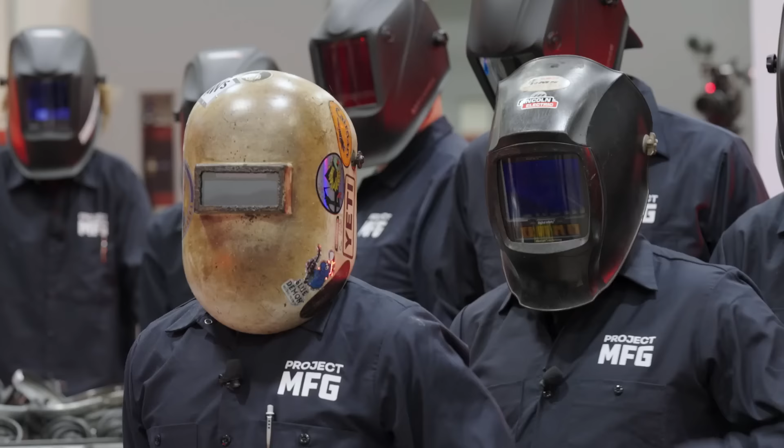Our second place competitor made up for his slightly lower score on the written test by welding a nearly flawless final product, only missing 1 point in the detailed visual inspection. This was enough to move Clayton Womack up to second place. It's a pretty good feeling. Definitely encourages me and wants me to drive forward and pursue this even more.

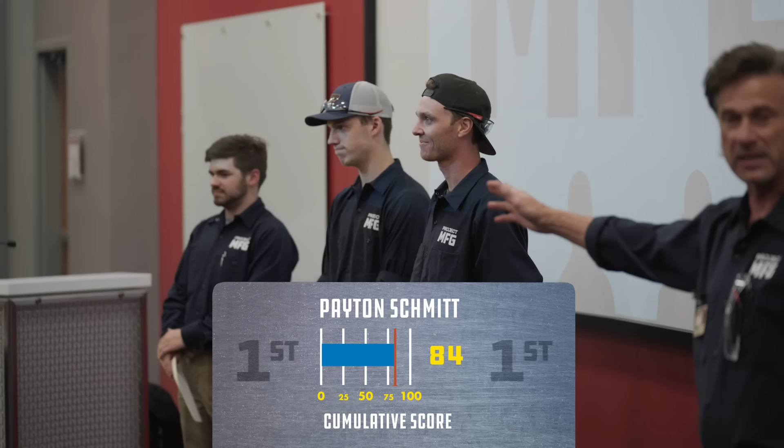And now, the winner of Clash of Trades and the Project MFG National Welding Challenge, Peyton Schmitt. Despite some hiccups in the booth, Payton proved to be a well-rounded welder with critical thinking skills when things got tough. He also only missed 3 points in the visual inspection. Payton takes home $3,000 and the title of Project MFG National Welding Champion. To have won the competition, it feels amazing. Knowing that I was up against 14 people and I was the best, it's crazy, man. There's no other words to describe it. I really can't describe it.

With the money that I won, I will be able to do so much with it, as far as starting my business. I will be buying nothing but big tools with it. My dad, I'm sure he'll call me up, tell me how proud he is of me, and I'll thank him for how much he's done for me. It's gonna feel awesome to tell him that.